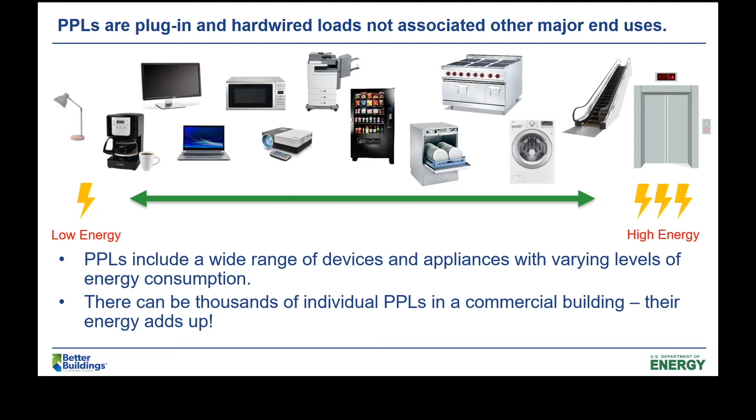So currently, plug and process loads account for 47% of US commercial building energy consumption, and that figure is expected to increase as other building end uses continue to become more efficient and more electronic devices come online. Most building owners have put off addressing plug and process loads while they tackled other end uses such as lighting or HVAC, but plug and process loads are becoming a growing piece of building energy consumption, and it's time to

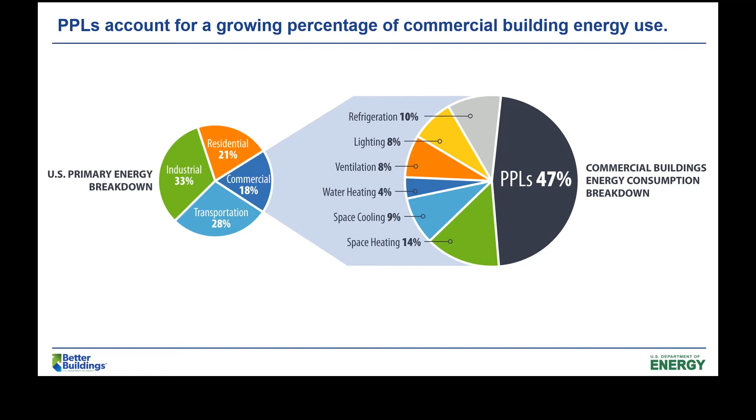start addressing them. So hopefully this presentation gives you somewhere to start if you have not begun your plug load journey, and if you have already started, I'm sure there will be some new information in here for you as well. Next slide.

So we're going to talk about how plug and process loads can contribute to your low carbon strategy. The first way that we can get to low carbon is by addressing your building's base load. So the first step in the decarbonization priority waterfall is energy efficiency. Before you tackle on and off-site renewables, grid interactivity, and carbon offsets, it's important to make sure your building is as efficient as possible. You want to minimize that wasted energy consumed by plug loads or other end uses.

So reducing PPLs can have a huge impact on your building's base load. Consolidating plug and process load devices can reduce PPL energy consumption by up to 50%, and current control technologies can cut PPL consumption by up to 30%. Next.

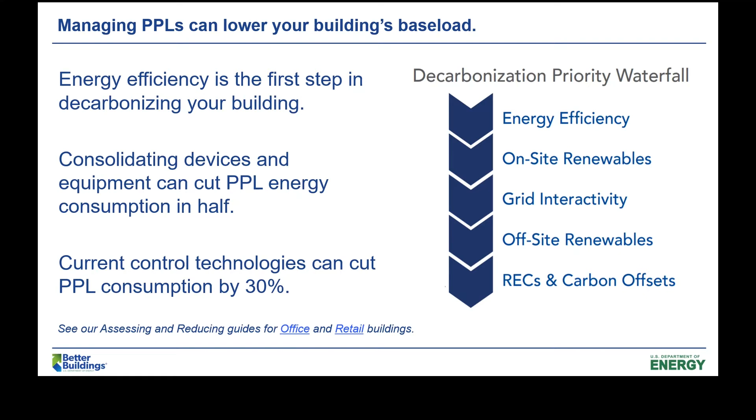Grid interactive efficient buildings are another way to lower your building's carbon footprint. Integrating PPL control systems with the building automation system can enable these grid interactive efficient buildings. This will allow for whole building response to grid signals and allow the building to shift, shed, and modulate all of its loads, which will become increasingly important as more renewables come on the grid and the energy sources are more volatile. Next slide.

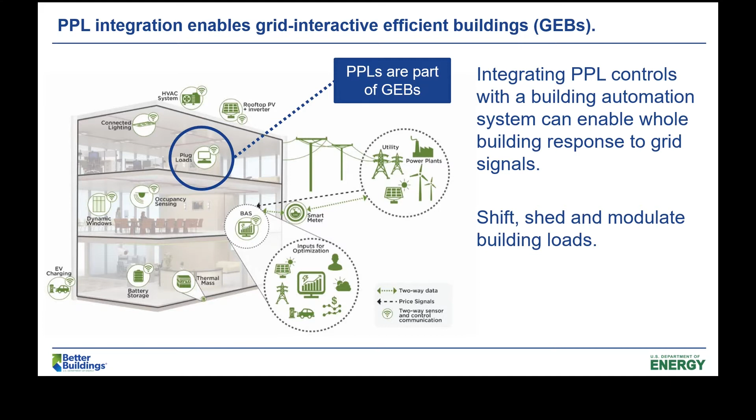And then finally, electrification can also contribute to lowering your building's carbon emissions. So within PPLs, we're talking about replacing gas-powered equipment with electric. Most common gas-powered equipment is in kitchens and laundry rooms. So these would be the types of devices that you would target with electrification.

A key thing to note with this strategy is that you want to make sure that your building's electrical system is robust enough to allow high power and high voltage electric equipment to come online. So it's something to check before you decide to make this electrification switch.

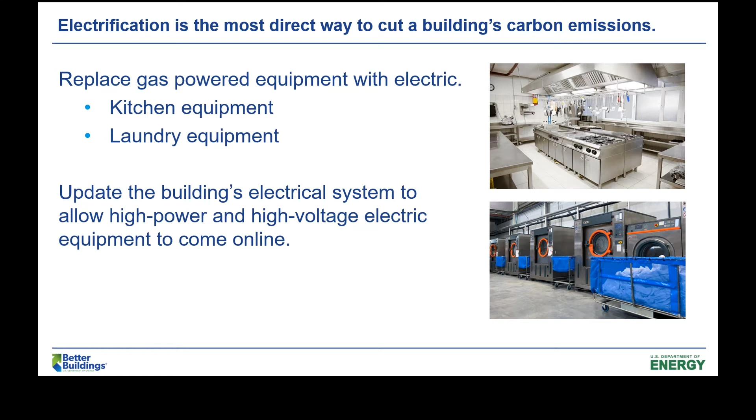Next slide. So we're going to focus primarily on PPL reduction strategies today, which is targeting that first method that I mentioned, which is reducing your building's base load. So there are two primary ways to reduce the base load. One is through control technologies. So these are devices and systems that turn off PPLs based on a schedule, occupancy sensor, or activity sensor.

And then there's also management strategies. These are things like occupant engagement, encouraging your occupants to have energy saving behaviors, and building policies like consolidating equipment and procurement specifications for the equipment that you put into your building. Next.

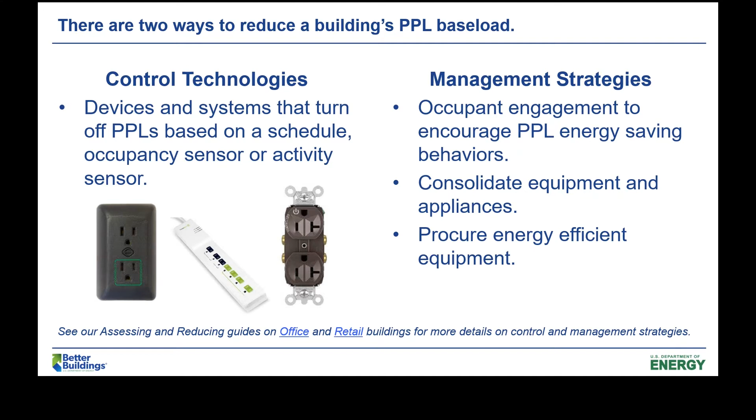We'll start talking about the control technologies first. I'm going to touch on 4 of them. The first is low power and sleep settings. So these are available on many devices. Some are enabled out of the box, and others are not and require the user to enable these settings. So this is something to keep in mind and check on your existing devices in your building.

The Community College of Allegheny County presented on a recent plug and process load technology research team webinar, and they were able to save 74% on their campus computer energy by enabling sleep settings that had been previously disabled. This did not require any capital cost, just creative thinking and some help from their IT department. So there's a link to the webinar here if you want to learn more about that energy saving strategy.

Another control technology are advanced power strips. So these look like regular power strips, but some of the outlets are controlled based on timers, activity sensors, or other outlets on the power strip. The timer capability will power devices off at certain times of the day. This is especially useful for controlling devices that don't need to be on during unoccupied hours.

Some APSs have one outlet dedicated for a controlling device, and that device's activity controls other outlets on the power strip. So this is useful for workstations where a computer would be plugged into the controlling device outlet, and when the power strip senses inactivity, it powers down the other outlets that could have auxiliary devices such as monitors, speakers, and printers plugged in. We have a fact sheet linked at the bottom if you want to learn more about advanced power strips. Next slide.

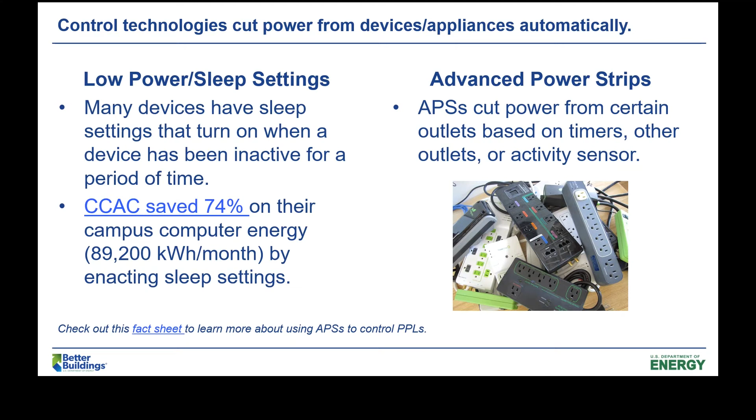So smart outlets are another great control technology that has been gaining traction in buildings. Smart outlets are wireless meter and control devices that sit between the wall outlet and the PPL device plug. And they are able to operate as a system, which is different from the advanced power strips, which are just standalone devices. So the smart outlets are able to communicate with a central system for someone like a facility manager to access energy metering data and controls from a dashboard. When the system is installed, where devices are plugged in are logged in the system, so the user could apply specific controls to a certain device type or to a specific location in the building.

And then the final control technology I'll touch on here is automatic receptacle controls. These are similar to smart outlets in that they operate as a system, but they actually replace the receptacle in the wall. And the controls are commonly sent via hardwired communication pathways rather than wirelessly. Some ARCs have one controlled outlet and one regular, and others have both outlets being controlled. Most have an override button on them so that if the outlet is shut off, but an occupant wants to use it, they can press the button and override the control so that they can still use the electricity.

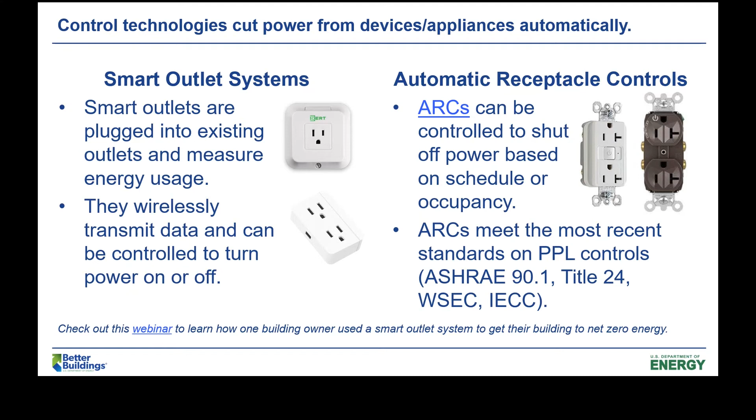All right, so we'll touch a bit on the management strategies here that you can also implement in your buildings. These management strategies could be used on their own, or they could be used in tandem with the control strategies that we just talked about. There are 2 categories, building policies and occupant engagement. So building policies include actions such as timing software updates, scheduling the updates at times closer to business hours, which allows the equipment to be shut off during non-business hours and saves energy that way. Another policy is consolidating loads. This entails replacing redundant loads with one larger load of the same type.

So for example, there could be 5 small printers spread throughout an office space, but this could be replaced with one larger printer that serves the whole office and reduces the plug load that way.

Replacing inefficient equipment with energy efficient models is another great way to reduce energy use. But of course, it is not always cost effective or sustainable to replace equipment before it's reached its end of life. So you could also incorporate energy efficient specifications in your procurement process or in your low carbon pilot action plan. That way you're planning for future energy savings and you have that plan in place to purchase the more energy efficient equipment.

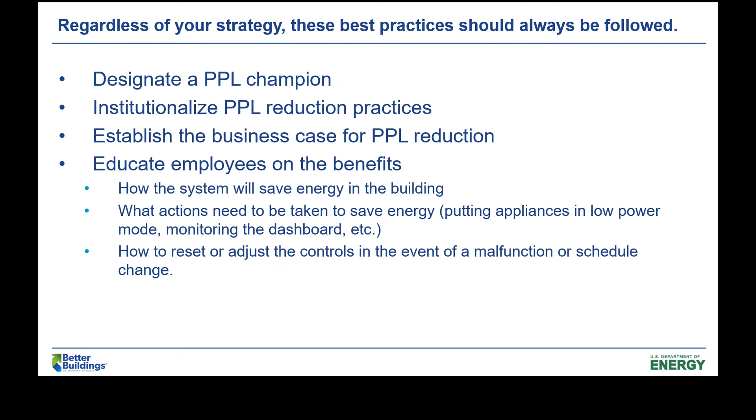So I wanted to provide some other considerations here for those of you who have tenants and are leasing your building space. One way to encourage your tenants to adopt PPL control and management strategies is to establish corporate guidelines requiring PPL management. You could provide trainings for occupants to turn off or unplug their electronics and appliances when they're not using them. And you could also provide control technologies for the tenants. Advanced power strips are a great option for this. They're relatively inexpensive and very easy to install.

You should also consider implementing a green lease or performance-based lease. This would allow you to set PPL performance goals and keep track of their progress using submeters. And you could also include PPLs in the tenant's energy consumption limit. If you're interested in learning more about these leases, reach out to Hannah Debelius. She has lots of great information about those. Next slide.

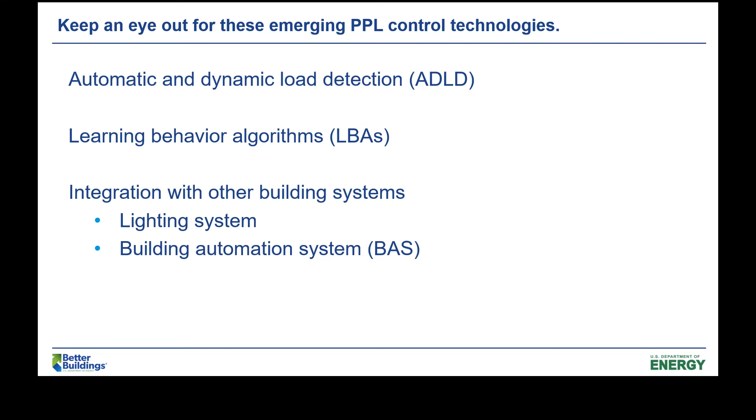All right, so I wanted to hit a few of the emerging technologies that are coming out that you should keep your eye out for. First is automatic and dynamic load detection. There's learning behavior algorithms which use artificial intelligence, and then integration, which we've touched on a little bit, but I want to go into a bit more detail on that. Next slide.

So automatic and dynamic load detection, or ADLD, identifies devices as they are plugged in and keeps the plug load management system up to date. So we see this primarily being used in a smart outlet-based system. It would allow the system to be plug and play by reducing installation time and reducing issues arising from devices moving around. So this technology would be most applicable in buildings where we see the plug load devices being moved around from outlet to outlet in daily use.

This would ensure that the correct control schedules were being applied to those devices. This is still a relatively new technology. It's expected to become available to the market within 3 to 5 years. Next slide.

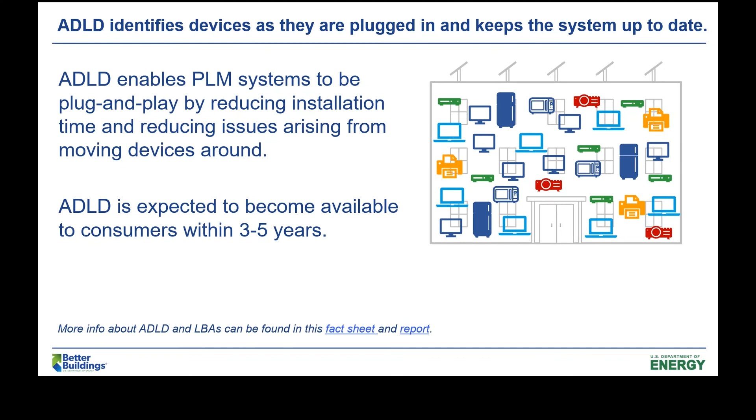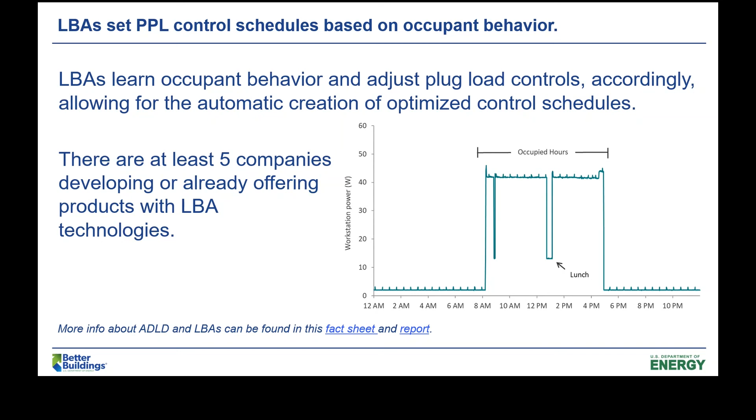And then learning behavior algorithms, or LBAs, use artificial intelligence to optimize the plug and process load control schedules. They spend time learning occupant behavior through their energy consumption to really maximize the amount of time that they can power these devices off and save energy. And there are at least 5 companies developing or already offering products with this technology. So if you're looking at smart outlets or automatic receptacle controls, keep an eye out for this capability. Next slide.

And the last emerging technology I wanted to talk about was integration. So a number of buildings and campuses around the US are starting to integrate plug and process load controls, both with their lighting control systems and their building automation system. So the lighting control systems integrate really well with automatic receptacle controls. I think I mentioned this earlier. You can use either the same control schedule or the same occupancy sensor for a space to control both your plug loads and your lighting loads.

And then some smart outlet companies and automatic receptacle controls are able to integrate with the building automation system. And this is really where you can gain whole building control and start to get into that grid integration piece, respond to grid signals.